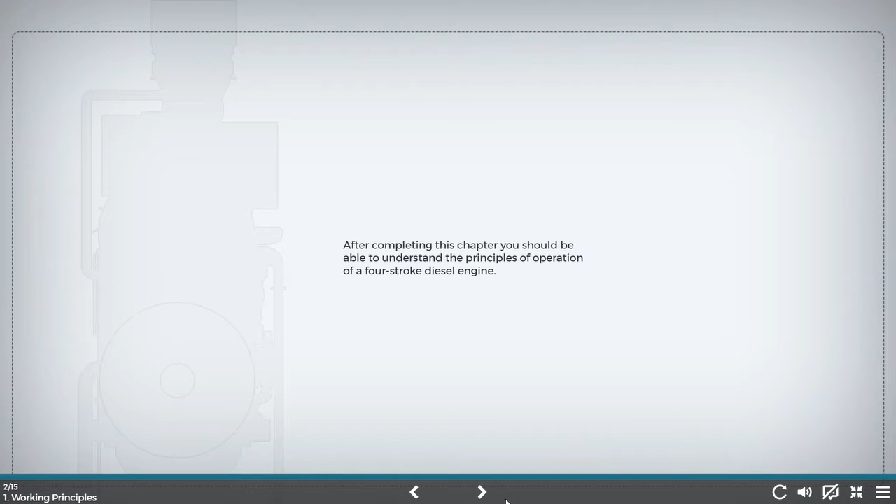The working cycle of a four-stroke engine takes place within 2 whole revolutions of the crankshaft and consists of the following 4 strokes: an intake stroke, a compression stroke, a power stroke, and finally an exhaust stroke.

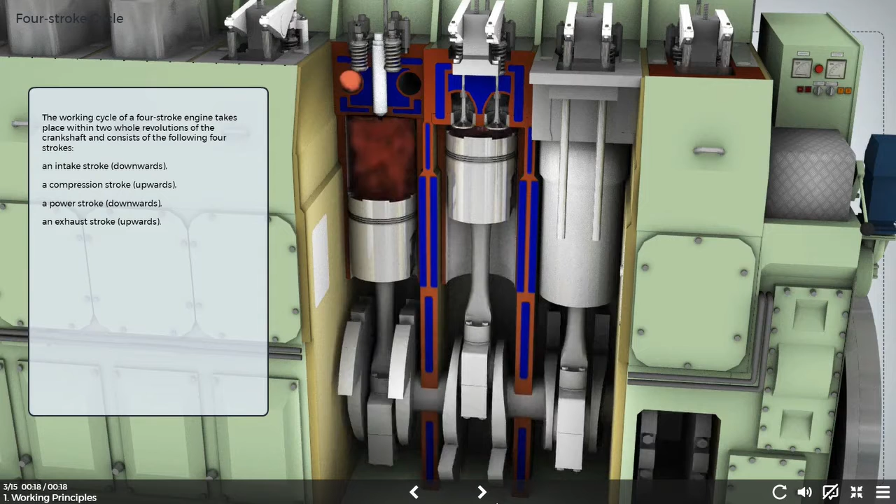Marine diesel engines convert the chemical energy contained in fuel, firstly into the thermal energy of hot gases, and then into mechanical energy and work on the crankshaft. The energy balance shows that, for a modern marine 4-stroke diesel engine, about 49% of the fuel energy can be converted into mechanical energy available at the propeller shaft.

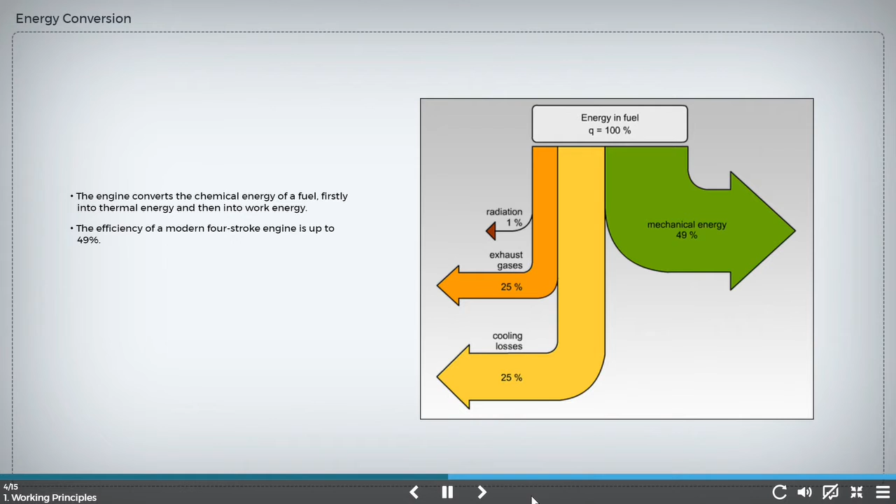Theoretically, about 15 kilograms of air is needed to burn 1 kilogram of a typical liquid fuel. Practically, due to the short time available for combustion, it is necessary to deliver about 30 to 45 kilograms of air for each kilogram of fuel to ensure complete combustion. The additional air also helps to cool the cylinder.

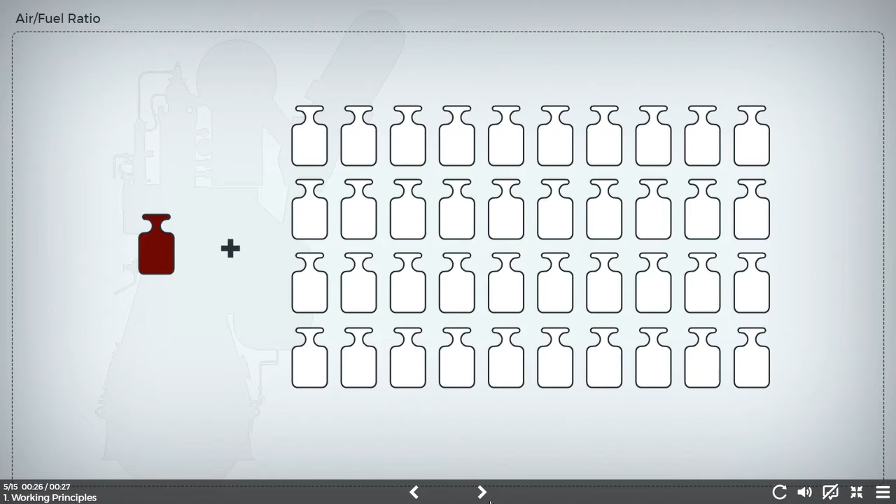The combustion air is cooled down before it enters the cylinder. Cooler air is more dense, so we can get more mass into a given volume. The air needed for combustion is usually delivered by a turbocharger, which increases the air pressure to around 3 bar.

Because it has been compressed, the air temperature rises to about 200 degrees Celsius, and we therefore need to cool it back down to about 40 to 60 degrees Celsius. The main aim of cooling the air down is to increase its density and deliver enough air to completely burn all of the fuel injected.

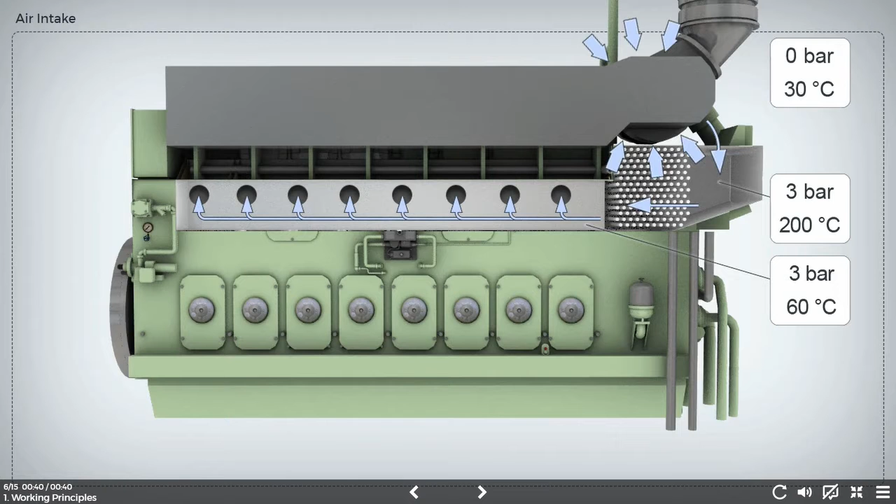The intake stroke starts when the piston is in the topmost position, called top dead center, and ends when the piston is in the lowermost position, called bottom dead center. The inlet valves are fully open.

The scavenge air enters the cylinder through the inlet valves, which are opened shortly before TDC. The scavenge air pushes out the remaining exhaust gases through the exhaust valves, which are still open at this point. In order to prevent the loss of too much scavenge air, the exhaust valve should be closed shortly after the piston starts to move down.

The compression stroke starts when the piston is in the lowermost position, called bottom dead center, and ends in the topmost position, called top dead center. In order to prevent the loss of too much scavenge air, the inlet valve should be closed shortly after the piston starts to move up.

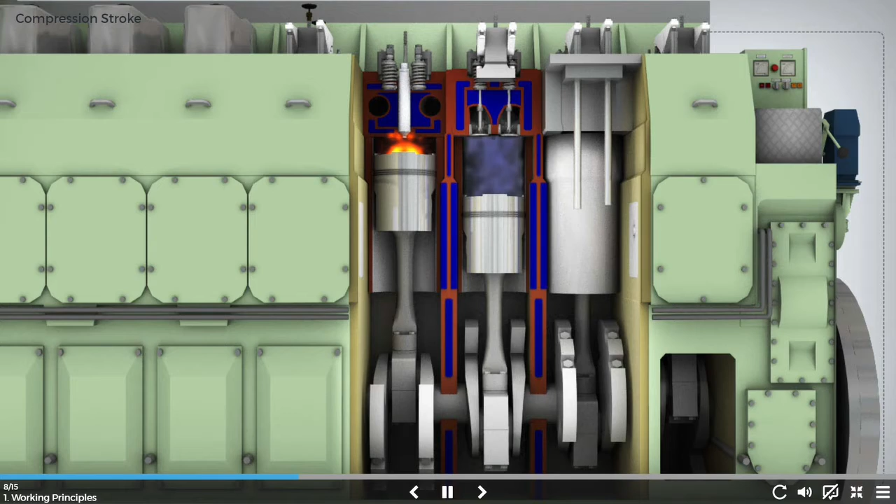The compression pressure can reach 70 to 100 bar, and the compressed air temperature has to be high enough to make self-ignition of the fuel possible. The compression stroke ends with the piston in the top position, top dead center, TDC.

The power stroke starts at top dead center, just after fuel injection has started. The power stroke ends at bottom dead center, and the exhaust valves open just before this.

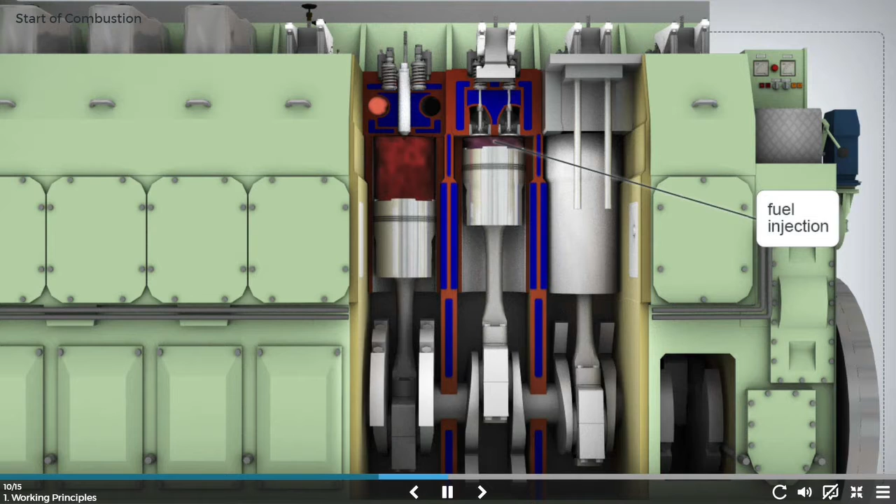Fuel injection usually starts just before top dead center. The actual fuel combustion starts slightly later than fuel injection, because the sprayed fuel drops have to be heated by the compressed air, vaporize, and then ignite. This period is called a self-ignition delay.

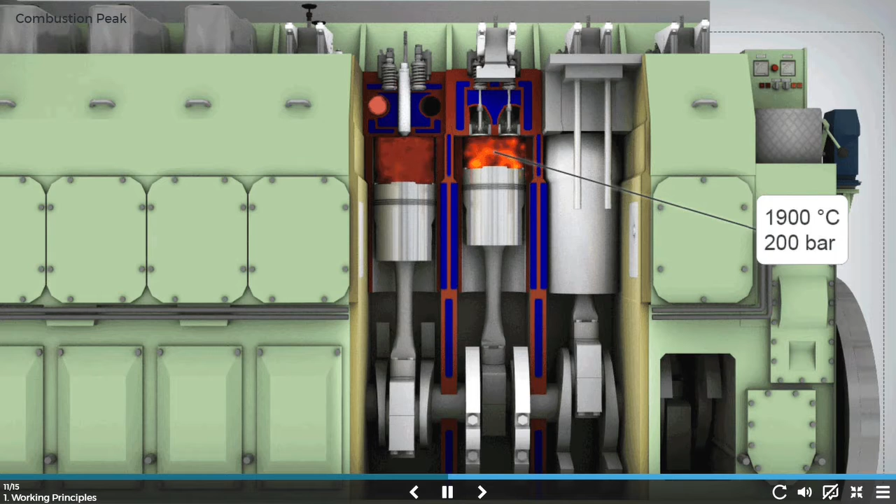The temperature in the combustion chamber increases rapidly when combustion starts and can reach as high as 1900 degrees Celsius. The pressure in the combustion chamber also rises rapidly and reaches about 150 to 200 bar maximum, and then decreases as the volume in the cylinder expands and work is done as the piston moves down.

The exhaust stroke starts at one bottom dead center and ends at the next top dead center. The exhaust valves are usually opened shortly before bottom dead center, so the very hot exhaust gases can quickly start to escape from the cylinder, and during the exhaust stroke they will be pushed out by the piston moving upwards.

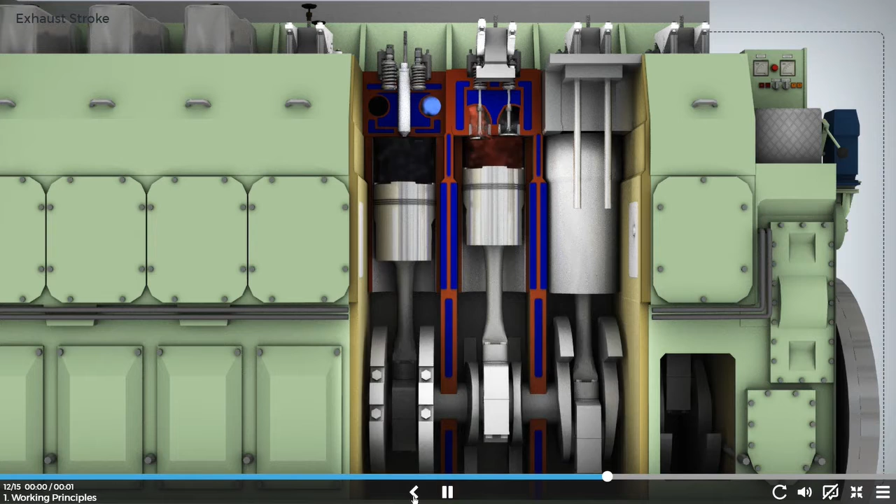Scavenging is the process of pushing exhaust gases out of the cylinder and replacing them with fresh air. The inlet valves open well before the piston reaches top dead center, and the exhaust valves are still open. But the pressure of the gases remaining in the cylinder is lower than the pressure of the scavenge air.

This prevents exhaust gases from flowing back into the charge air receiver, and is necessary for a proper scavenge process, which should force out as much of the exhaust gas from the cylinder as possible. In the four-stroke cycle, the piston pushes out most of the exhaust gases, so there is less scavenging of the exhaust gases by the fresh air charge coming into the engine.

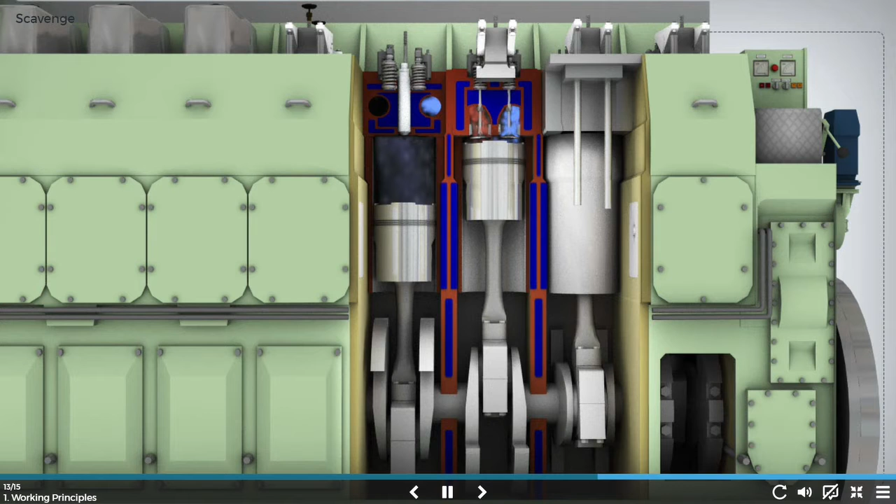The gases leaving the cylinder continue to expand in the exhaust duct, and are still at around 350 to 400 degrees Celsius when they enter the turbocharger. In the turbocharger, we extract more energy from the exhaust gas as it drives the turbocharger.

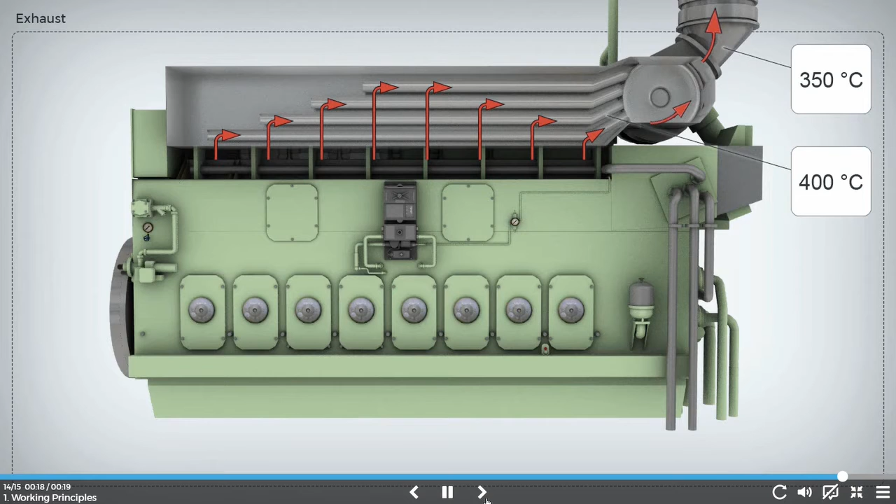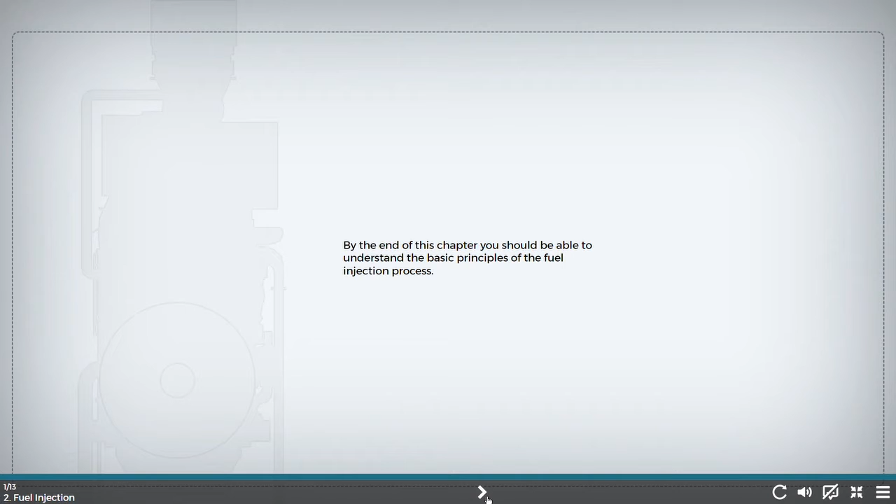The fuel necessary for combustion is compressed in a fuel pump and then delivered to an injector which sprays it into the combustion chamber. The combustion chamber is the space between the top of the piston and the cylinder head.

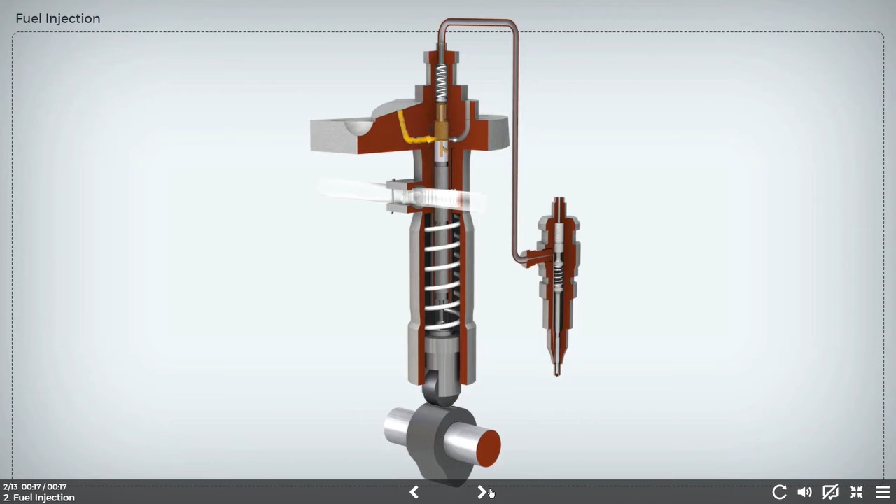The fuel pump consists of a cylindrical barrel and a plunger. The plunger can typically be rotated in order to control the amount of fuel injected.

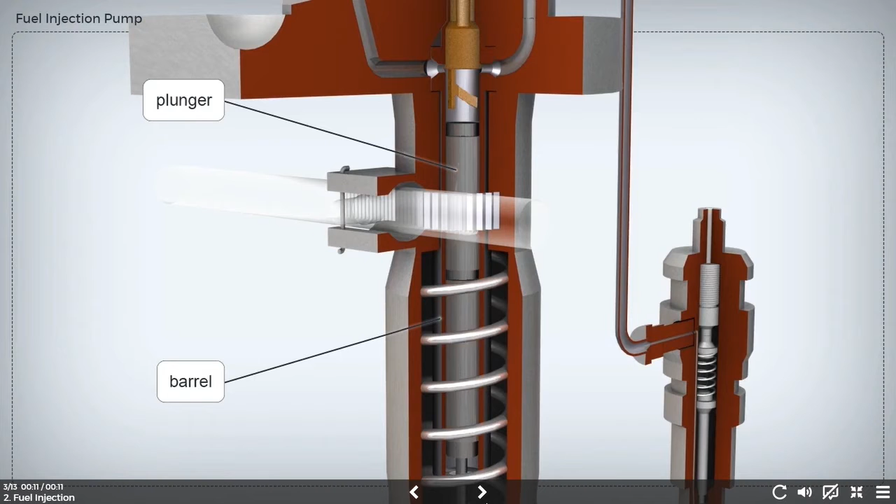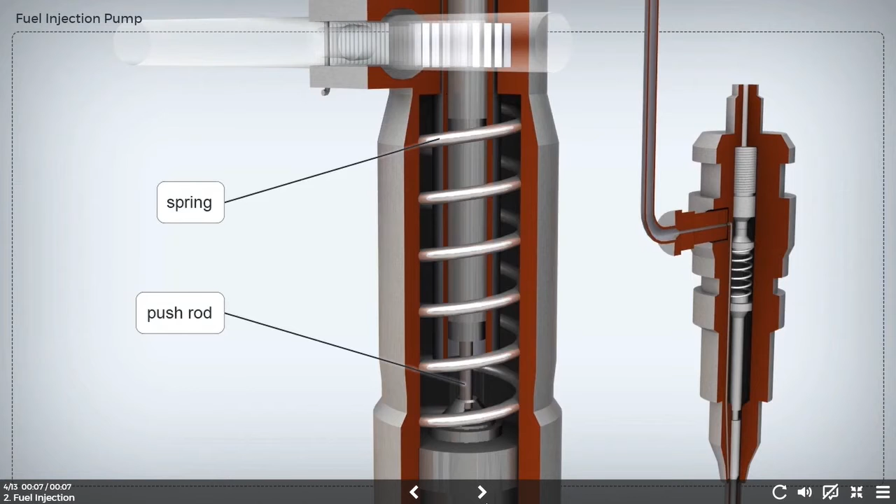The plunger is moved upwards against a powerful spring by a push rod connected to a roller. The roller is moved by a cam, which is fixed at the camshaft, but the camshaft itself is driven via a chain or a gear from the crankshaft.

In the four-stroke engine we are looking at here, the camshaft rotates at half the speed of the crankshaft. This is not the case for the two-stroke engine, where the camshaft rotates at the same speed as the crankshaft.

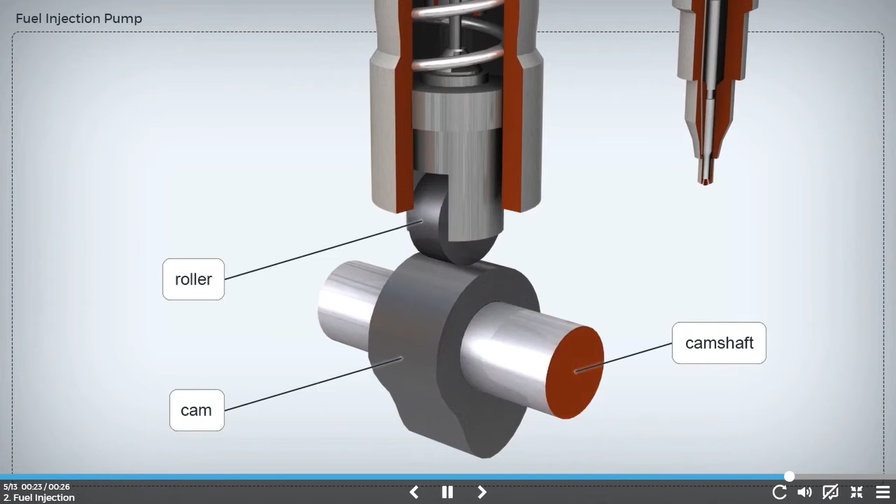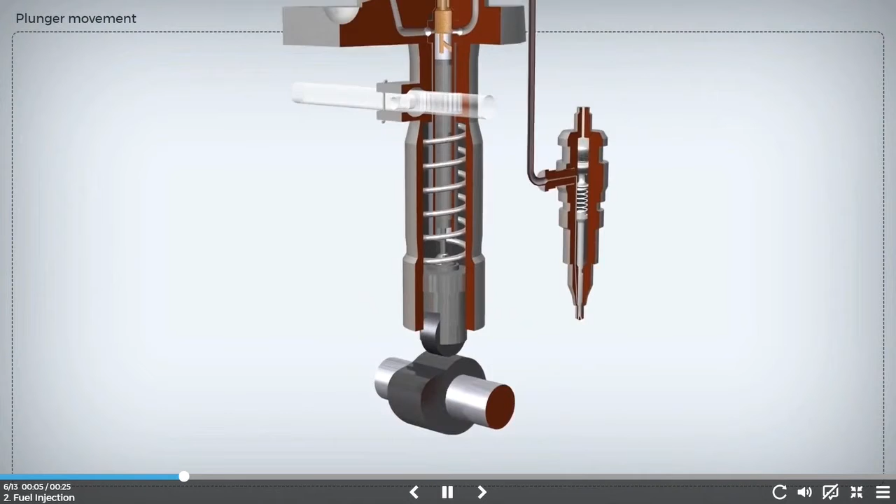When the roller is on the unprofiled part of the cam, the plunger stays at its bottom dead center, and the fuel pressure is approximately 3.5 bar.

As the camshaft rotates, the roller starts to be on the profiled part of the cam. The plunger is then pushed upwards, causing a pressure increase inside the barrel.

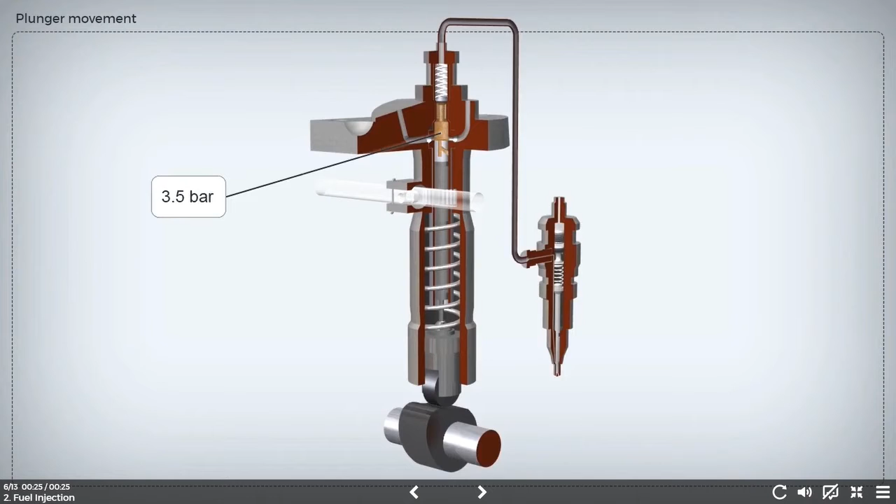When the pressure inside the fuel pump reaches the residual pressure inside the line to the injector at about 60 bar, the non-return valve on the top of the fuel pump opens, and the fuel pressure starts to build up in the line to the fuel injector.

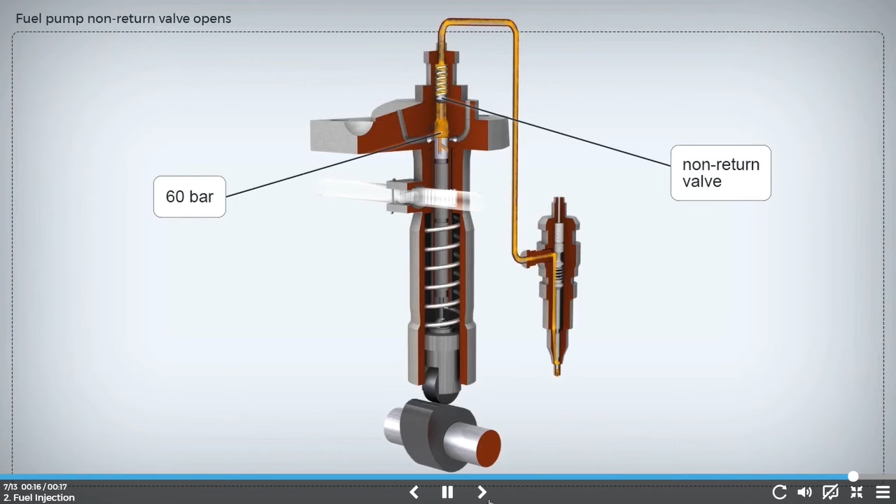When this pressure wave reaches the injector opening pressure, typically 250 bar, the injector needle valve opens and the fuel starts to spray inside the cylinder chamber through the injector nozzles.

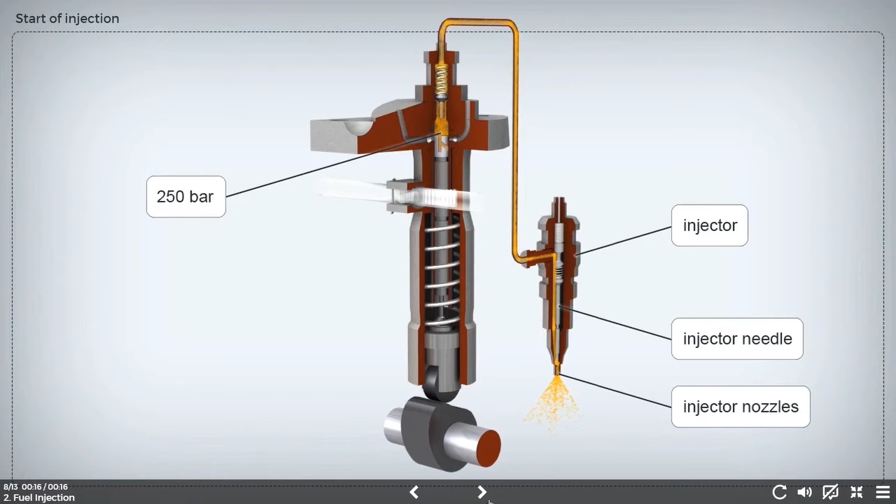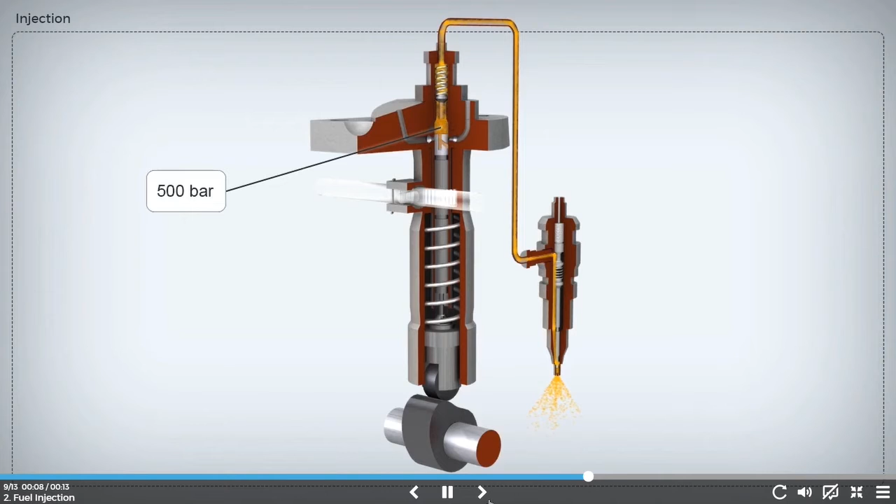As the fuel pump plunger continues to move upwards, the pressure continues to rise, increasing the injection pressure, which can reach as high as 500 to 1,500 bar.

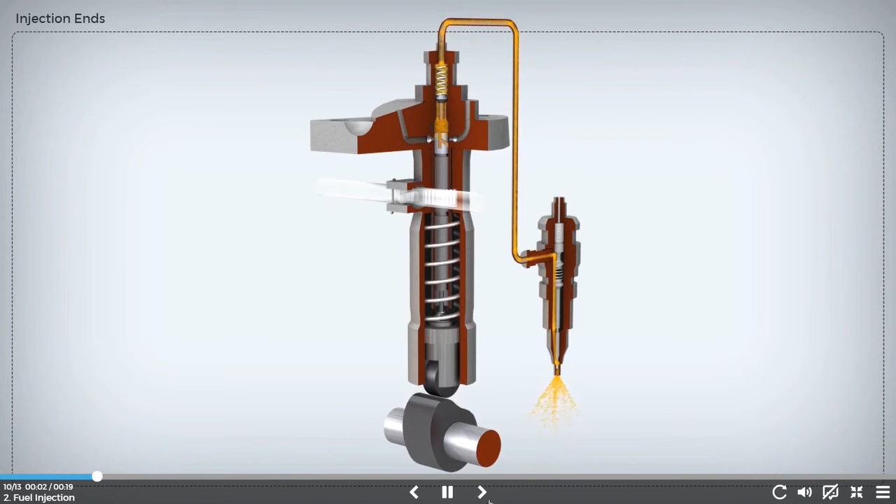The injection process ends rapidly when the helical groove machined in the plunger connects with the spill port in the fuel pump. This causes a rapid fall in the injection pressure, and once this is lower than the injector opening pressure, the injector needle valve will close.

As the cam continues to turn, the plunger moves down. On the downward stroke of the fuel pump, low-pressure fuel delivered by an external feed pump enters the fuel pump barrel. The fuel pump is then ready for the next cycle.

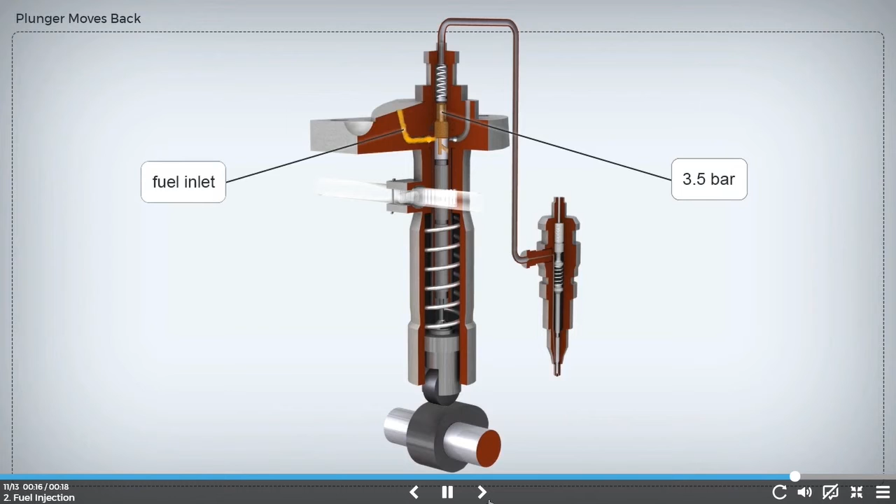The moment when the injection ends depends on the effective stroke of the fuel pump. This depends on the angular position of the plunger groove against the spill port. This position can be changed by turning the plunger inside the barrel by a rack and pinion at the lower part of the plunger.

If you watch the animation carefully, you would have seen how the fuel rack moved back and the fuel quantity decreased. Replay the page if you want to see this again.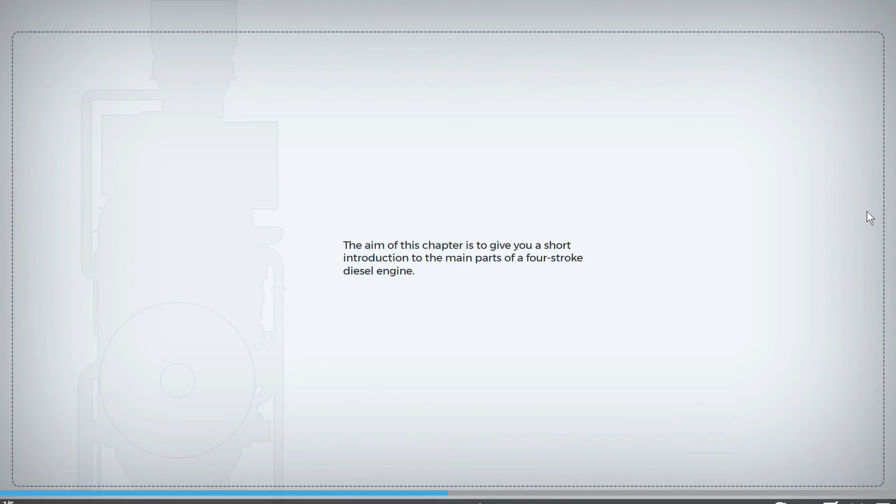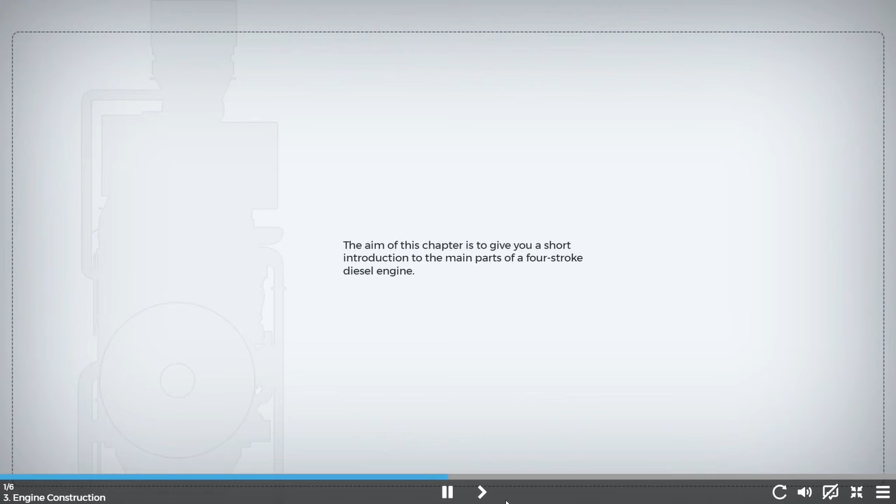This chapter is to give you a short introduction to the main parts of a four-stroke diesel engine. We will be looking in more detail at some of these parts in later chapters.

Four-stroke marine diesel engines are also called medium-speed or high-speed diesel engines because their maximum speed is in the range between 400 and 2000 rpm for medium speed and 2000 to 4000 rpm for high-speed engines.

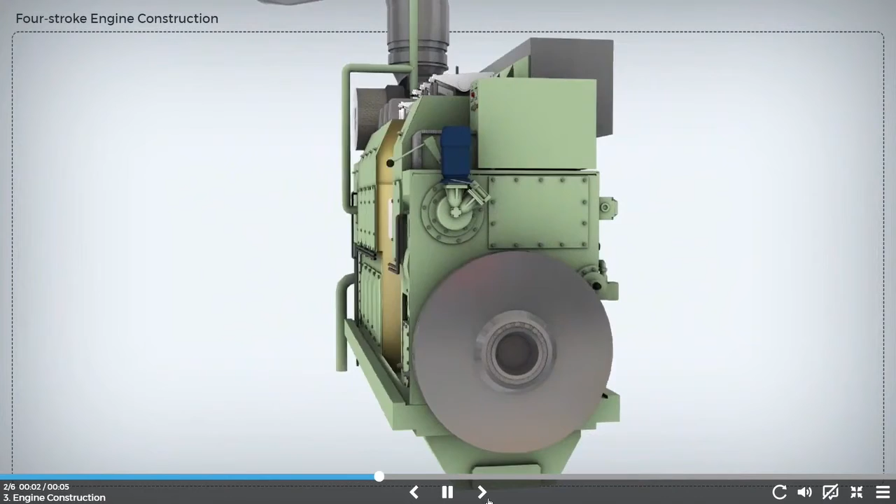Here you can see the four-stroke engine main components visible from the flywheel end.

Here you can see the four-stroke engine main components visible from the air receiver side.

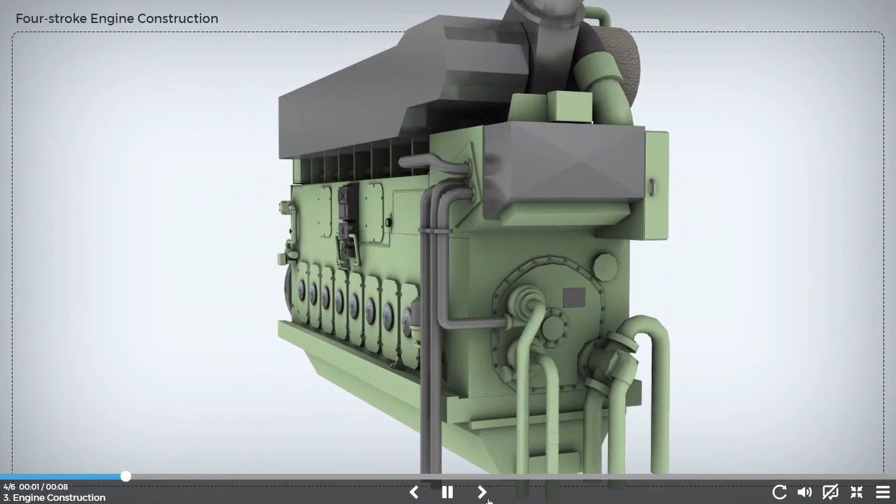Here you can see the four-stroke engine main components visible from the non-flywheel end.

Here you can see the four-stroke engine main components visible from the fuel pump side.

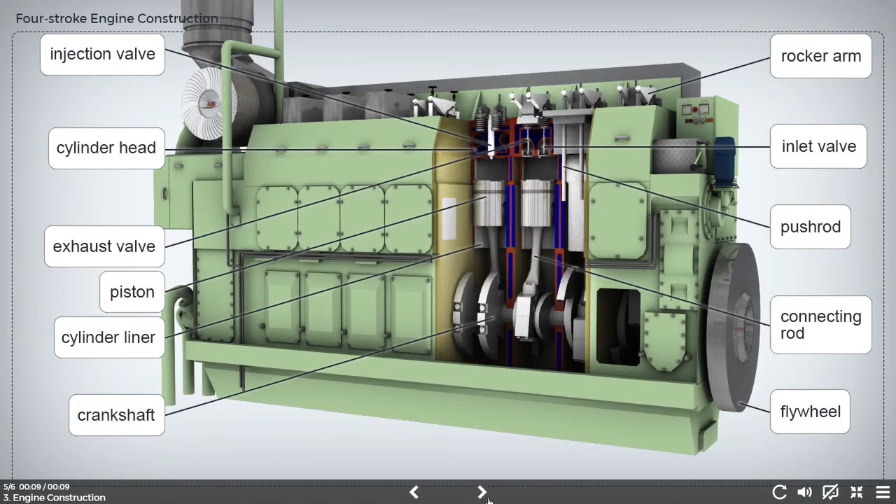By the end of this chapter, you should be able to identify the stationary parts of a four-stroke diesel engine and state their function.

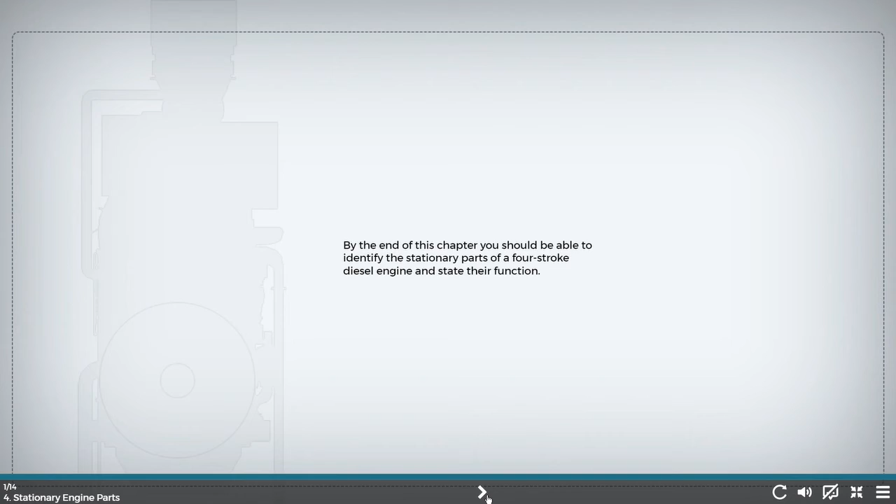The cylinder block forms the housing which holds the cylinder liners and has to withstand all the mechanical forces and torques whilst providing rigid support for the crankshaft. The charge air receiver is usually integrated within the cylinder block.

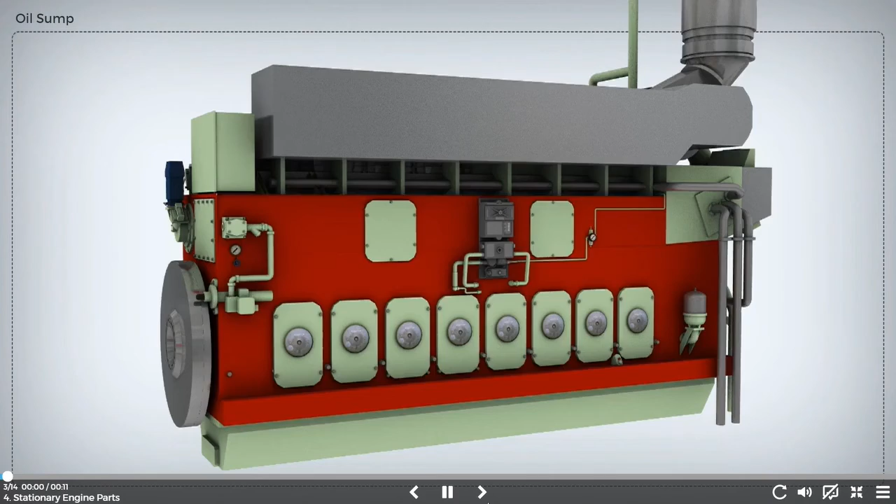The lubricating oil sump is fitted below the cylinder block and is used for collecting the oil after it has lubricated the bearings, etc.

The liner is the stationary cylinder which the piston moves in. The liner and the piston form the combustion chamber where the fuel is burned. The critical region of any cylinder liner is the upper section, where the temperature and pressure conditions are highest and therefore most difficult. This is why cylinder liners need to be cooled, so that they maintain their strength.

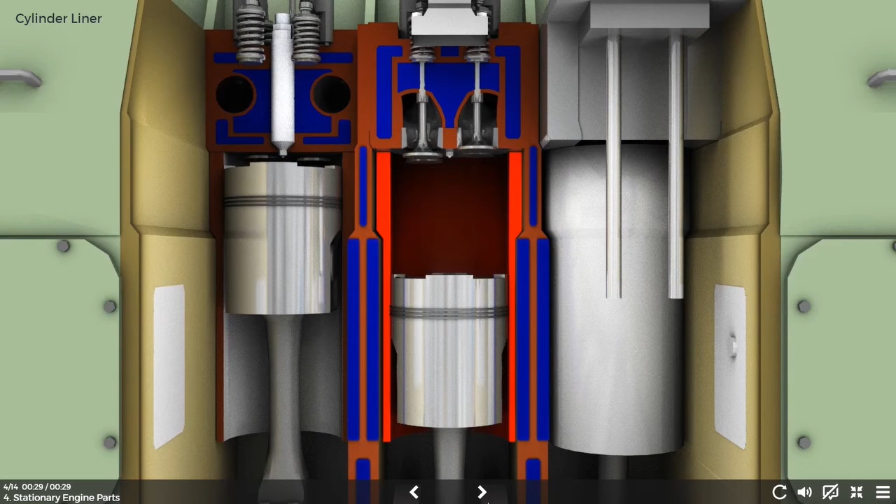The cylinder head fits over the cylinder liner and forms the upper part of the combustion chamber. Many other important engine parts, like the inlet and exhaust valves, the fuel injector and the starting air valve, are located in the cylinder head.

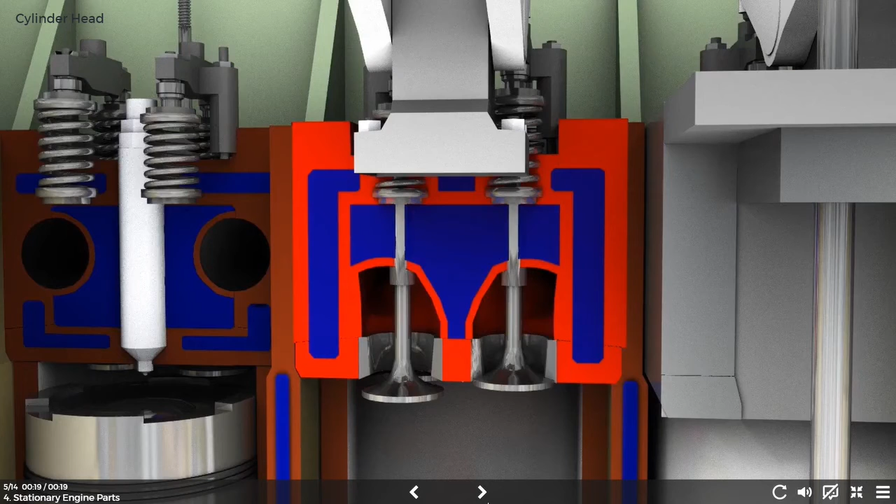We will also take a look at some of the moving parts connected with the cylinder head whilst we are in this section.

The push rod is operated by a profiled cam on the camshaft and moves a rocker arm, which then opens the inlet or exhaust valves.

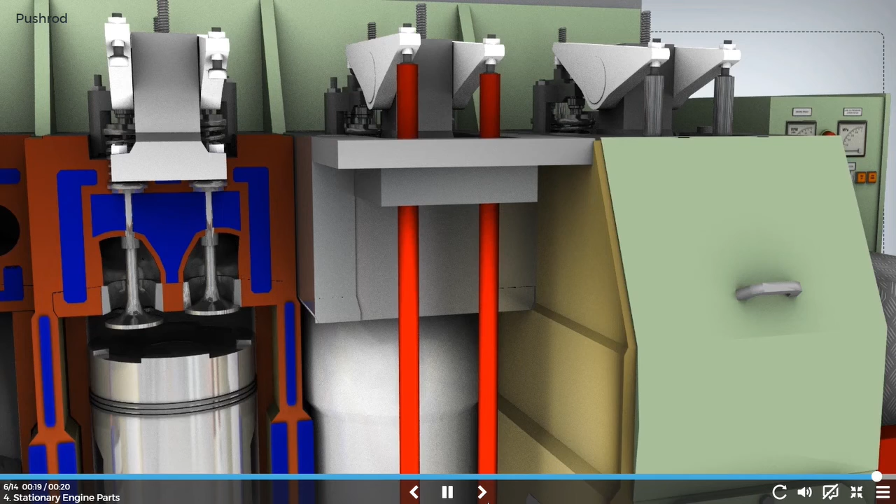The rocker arm is an oscillating lever that converts the movement of the push rod into linear movement of the inlet or exhaust valve to open it. When the outside of the arm is allowed to return due to the camshaft rotation, the inside rises, allowing the valve spring to close the valve.

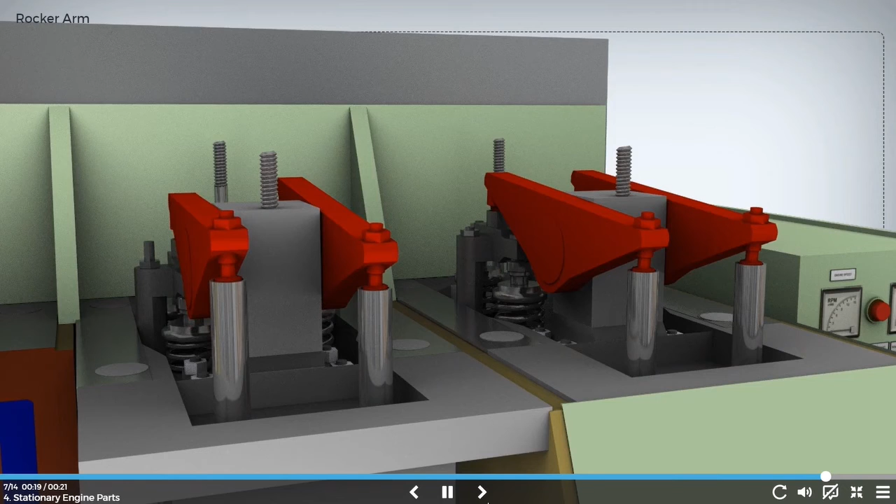When opened, the inlet valve passes the scavenge air from the air receiver into the combustion chamber. It is usually closed by a spring and opened by the camshaft via a push rod and rocker arm.

The exhaust valve passes the hot exhaust gases from the combustion chamber to the exhaust pipes. It is also usually closed by a spring and opened by the camshaft via a push rod and rocker arm.

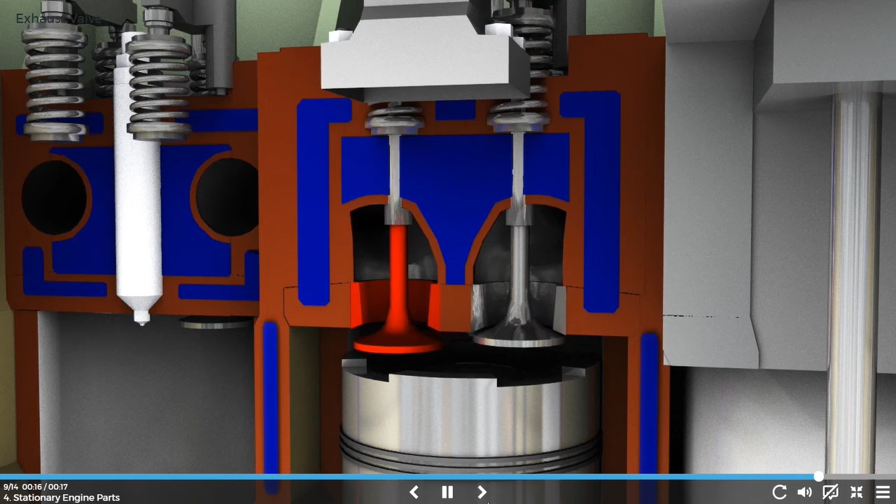The fuel injection valve sprays fuel into the combustion chamber. The fuel is delivered by a fuel pump, which is driven from the camshaft.

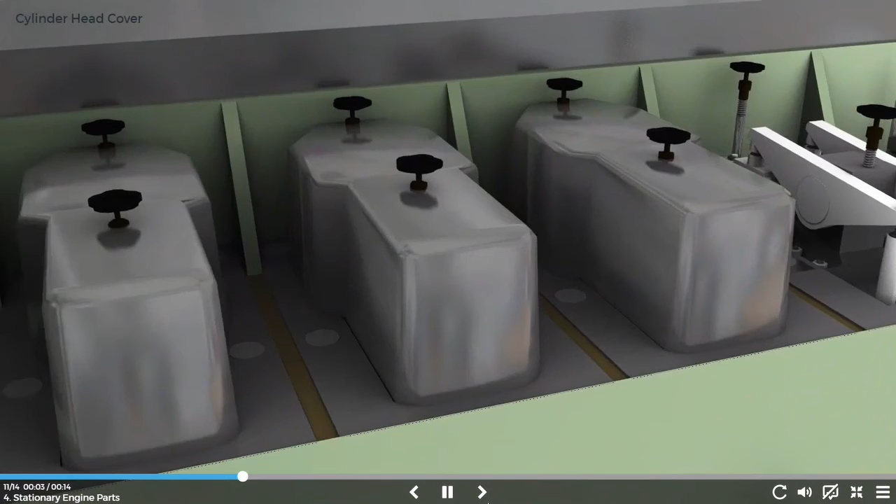The cylinder head cover fits over the cylinder head and covers the rocker arms and push rods. This reduces noise and heat emissions to the surroundings and prevents loss of lubricating oil.

The turbocharger consists of two main parts, mounted on a common shaft. The exhaust gases are used to drive a turbine mounted on one end of the shaft, and this drives the air blower at the other end of the shaft.

The air blower draws air in from the engine room, compresses it, and supplies the scavenge air at a pressure higher than atmospheric. After the turbocharger, the gases are led out to atmosphere via an exhaust duct to the funnel. Typically, a medium-speed engine will have one turbocharger.

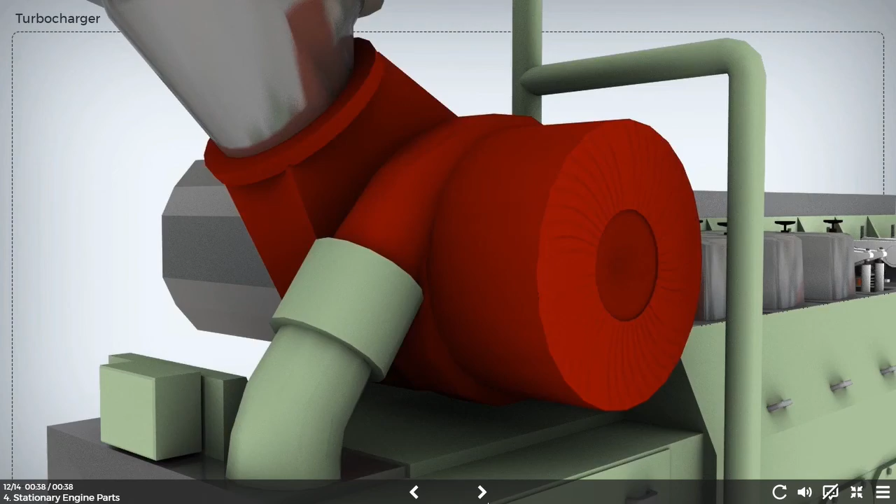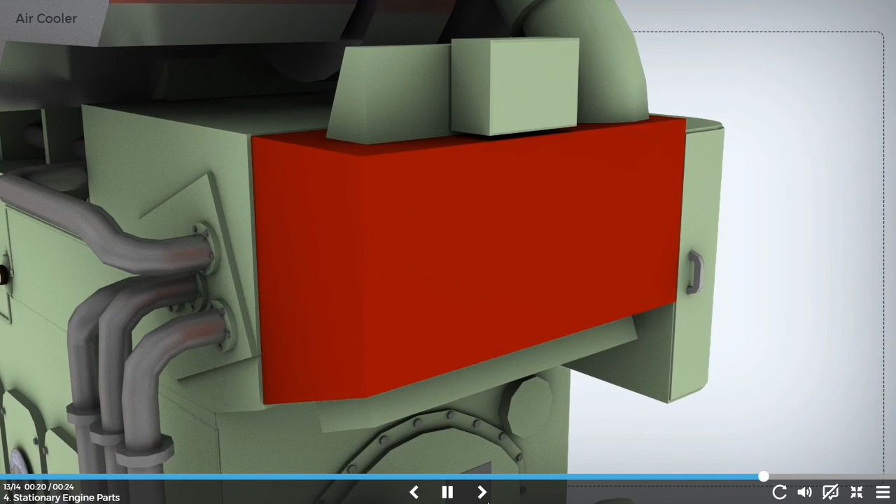The air cooler is needed to cool down the air coming from the turbocharger. When the air is compressed, its temperature rises, and we need cool air which has a higher density, enabling us to get a greater mass of air into the cylinder. The cool air also helps to cool the combustion chamber during the scavenge process.

In this chapter, you should be able to identify the moving parts of a four-stroke diesel engine and state their function. Let's start by looking at the piston.

The piston seals the cylinder and forms the combustion chamber. It is used to compress the air required for combustion and for transferring mechanical energy during the power stroke.

The almost flat upper part of the piston is called the piston crown, and the cylindrical lower part is called the piston skirt.

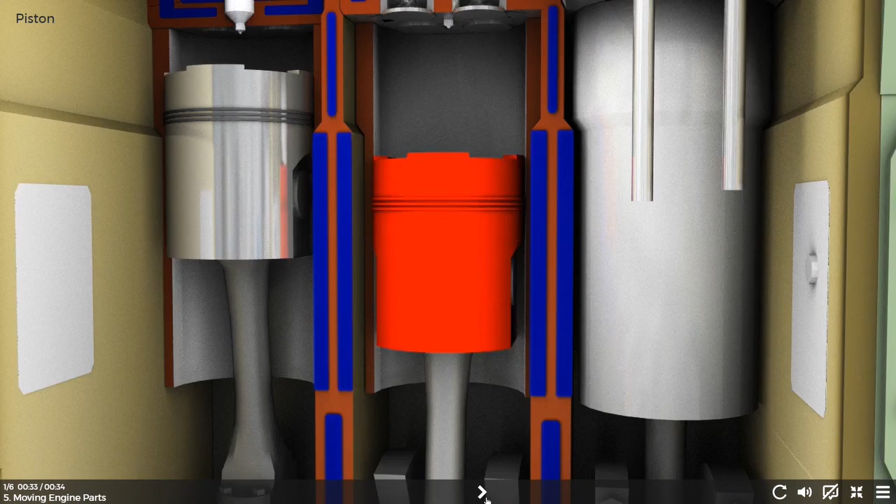The gudgeon pin is fitted through the piston and forms the bearing surface for the top end of the connecting rod.

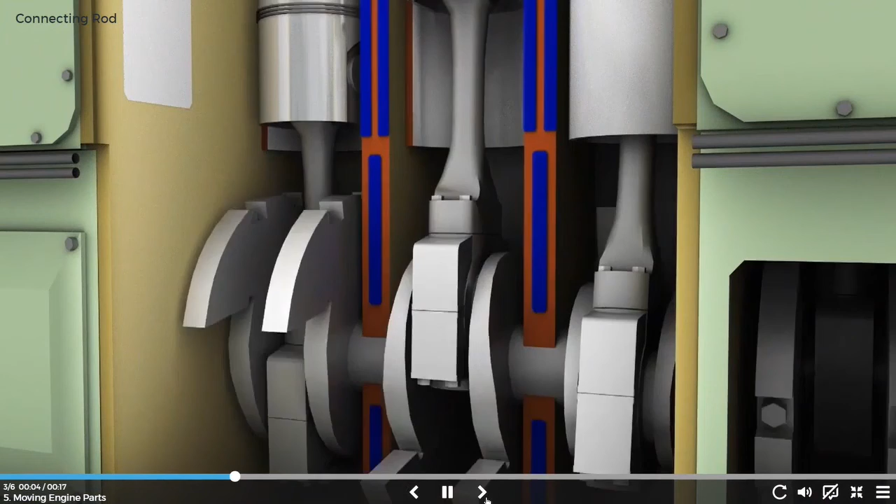The connecting rod connects the crank pin of the crankshaft with the gudgeon pin of the piston. The upper part of the connecting rod performs an oscillating motion and reciprocating motion, whilst the lower part performs a circular motion.

The crankshaft is turned by all the connecting rod cranks. It performs the final conversion between the reciprocating motion of the pistons and the circular motion of the shaft.

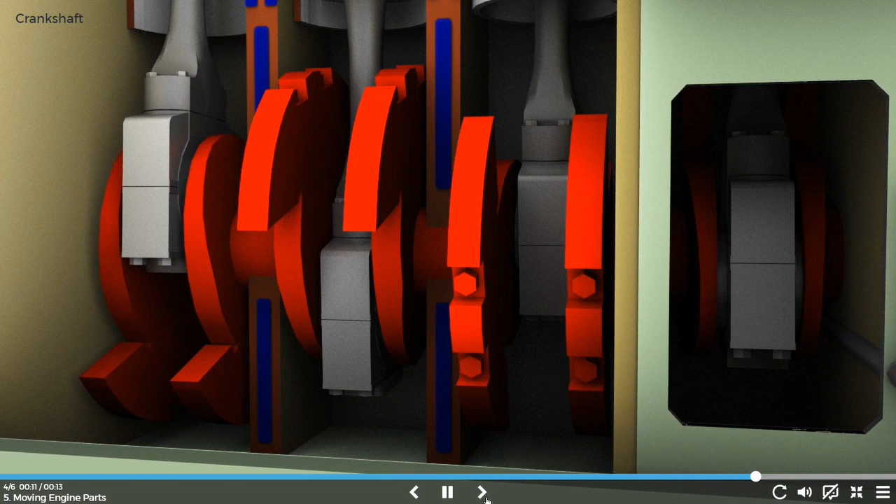The flywheel is a rotating disc used to store rotational energy. This energy is accumulated during the power strokes of the cylinders and then delivered to the shaft between the power strokes, in order to smooth out fluctuations in the engine rotational speed.